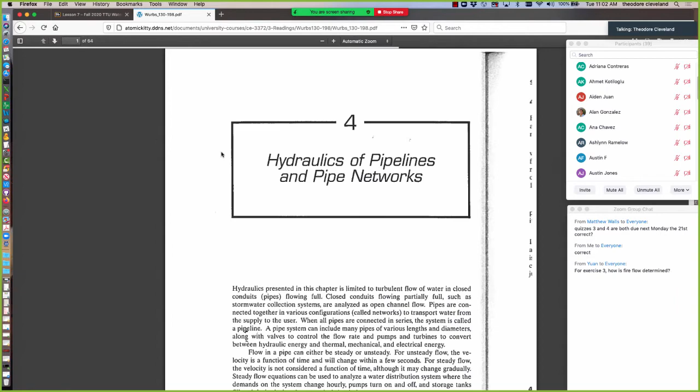Although there is a good reading on storage in the reading list in Wurbs. See if I can find it. I think it's that one. Let's find out. Yeah, so Wurbs 130 to 198 has a useful section on storage that I'm scrolling down to as everyone's logging in.

Possibly you're getting nauseous. That means I'm scrolling fast enough. Remember, if you get nauseous in my lectures, all you have to do is close your eyes and stop listening, and you'll be better in an instant.

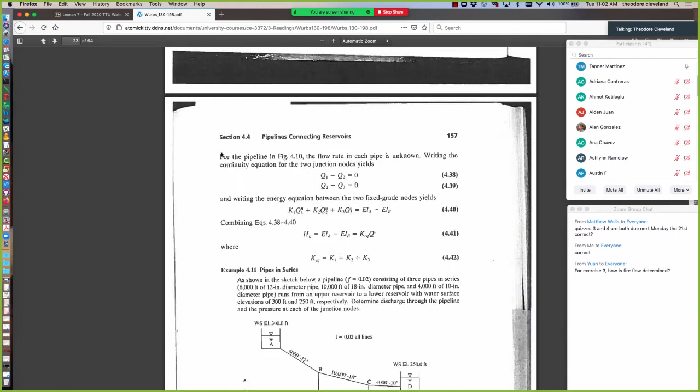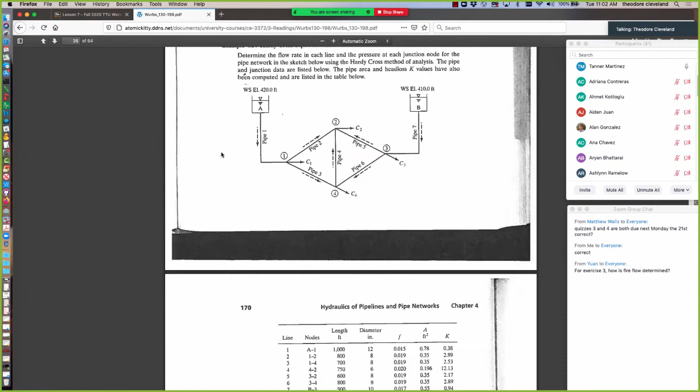We'll actually revisit this lecture in more detail starting Thursday when we start getting into network analysis. I'm pretty sure he has a whole section on storage tanks.

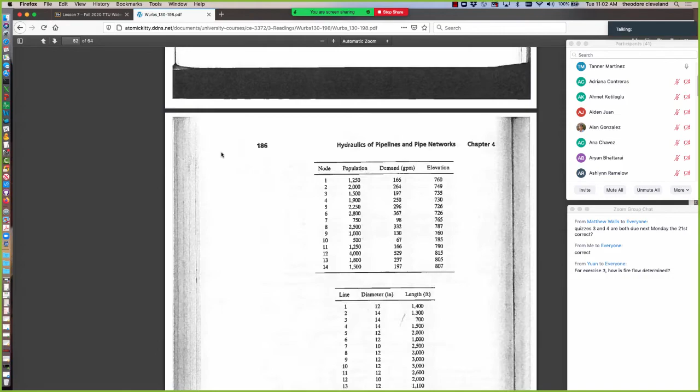Ooh, fans of my computer are coming on big time. So, yeah, we're getting there. There we go. He's got some discussion on storage, equalization, and fire, and so on. So that's a good reading.

I will try to modify the cover page to directly go to that reading. And so now we'll begin with our actual lesson notes.

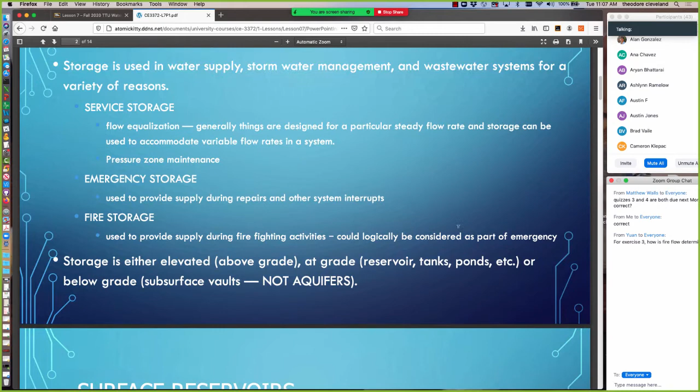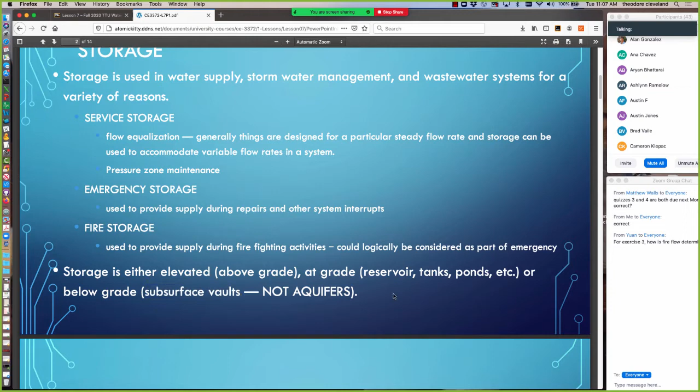Storage is either elevated, above ground, up in the air, at grade, on the ground, or in the ground, and below grade, which is subsurface vaults, not to be confused with aquifers. So subsurface vault and an aquifer are not the same thing, and it's pretty uncommon to confuse the two, but it's possible.

So surface reservoirs are used where natural elevation is high enough, and it provides us a way to use inexpensive pump storage. The reservoirs themselves are covered for their protection to prevent contamination, algae growth, evaporation.

Out there on the West Coast, a few years back, the city of Portland, Oregon, which seems to be making the news a lot lately, had some high school youth that contributed a bladder full of unacceptable water to a drinking water reservoir. And rather than just chlorinate the crap out of it, the city wasted hundreds of thousands of gallons of water from the reservoir to return it back to its usable condition. That's an example of where a cyclone fence might have prevented them from having to waste that water. I'm certain they're always young men, and I'm certain the young men had consequences for that, other than getting laughed at. Hopefully for their families, the city didn't charge them the retail cost of that water that had to be replaced.

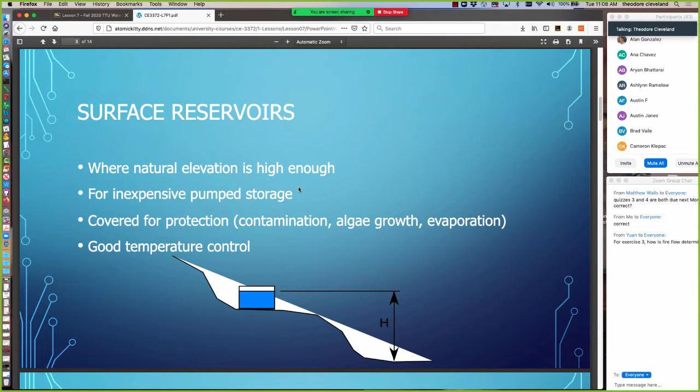For what it's worth, from a public health standpoint, there's no risk. I'm not encouraging you all to go urinate in reservoirs. That's generally a bad idea. But there's so much dilution, there's pretty much no chance of a pathogen coming out of you getting into the rest of the system, especially since the water is going to go through treatment.

So here's a diagram of what's meant by elevated storage. There's a reservoir up here, in this case on the side of a hill, and we want to serve down here. We have that much operating head, or energy, totally contributed by the pool elevation in the reservoir.

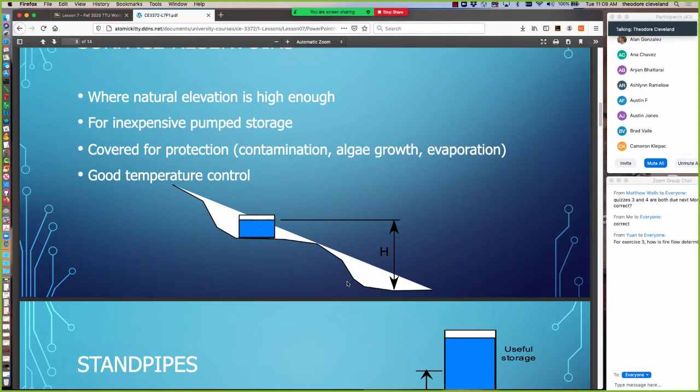So that's great, except here in Lubbock, where we don't have a whole lot of hills conveniently nearby. A second technology is called a standpipe, and these are, in their very essence, vertical cylindrical pipes, or usually cylinders, where the height is greater than the diameter, and it's filled with water. There's a pool elevation shown up here at the top.

There is a portion that's called useful storage, and then there's a portion called the supporting storage. The supporting storage is defined by the minimum desired pressure head we want in the system, and any storage above that is the useful storage. That's the volume above the elevation needed for minimum pressure, and the supporting storage can be employed in an emergency.

These are usually made out of steel or reinforced concrete. I've driven through Texas and seen some that appear to be a fiber reinforced polymer, like fiberglass, but I'm not sure. I didn't get out of the car and jump a fence and go bang on them to find that out.

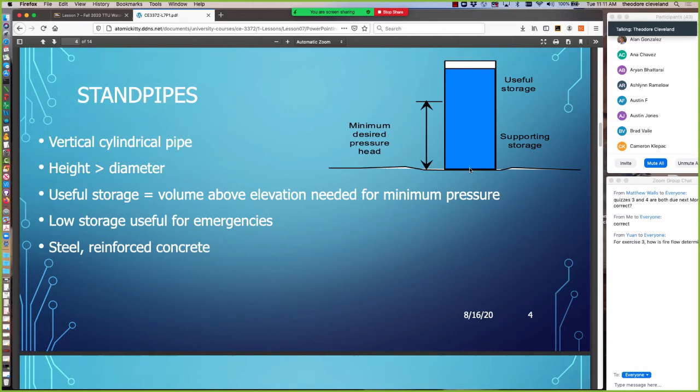It's quite possible the fiberglass was just an exterior coating. It has to be able to support the pressure down here at the bottom. So if there's 100 feet of water, that's nearly 3 atmospheres, which is going to be 45 psi at the bottom. But when you multiply by the area, that's a substantial amount of force, so there'd be some reinforcing at the bottom. But other than that pressure force, most of the weight is supported by the foundation on the ground.

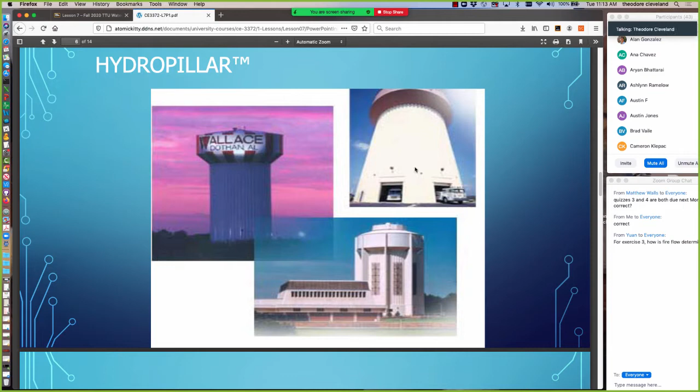A second design related to those is called the Hydropillar, and this is a brand. In these pillars, they've actually incorporated utility shops down at the bottom and the water up top. In earthquake country, I personally wouldn't want to live and work in this thing because I know how earthquakes are, and that thing would come and squash me.

A second morphology is called water spheroids. Again, the same basic design: there's a connection from the surface to the tank, providing the mechanical support as well as the infrastructure to bring water in and out of the tank, and then a spherical shape on top.

These have some utility compared to the Hydropillars. They can't get as big because of the structural requirements, since in addition to resisting vertical forces, there's clearly going to be wind forces. So these are on slender columns, and if you remember from your structures class, there are issues with slender columns—you need to be sure they don't have too much lateral force and bend over and crash and go boom.

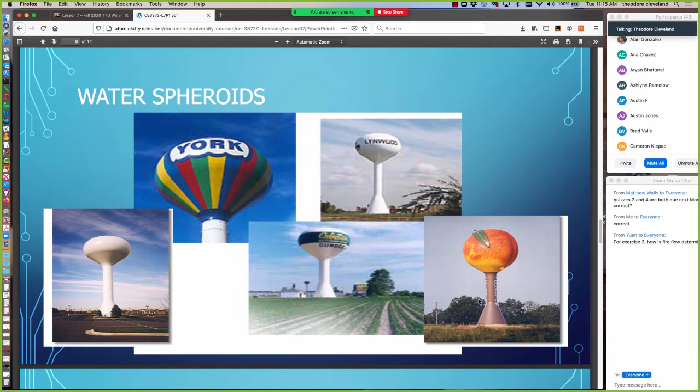So undoubtedly in this particular community, whether it's disguised as a peach, they probably grow and export peaches, or it's in Atlanta, I don't know which. They use the tower as advertising for the community. But it's the same basic thing, a big tank up in the air.

Moving to ground level tanks, we're all familiar with these. Here's large tanks with large diameter, relatively low height compared to diameter, and then here's a standpipe, where the diameter is smaller than the height. For the ground level tank, the diameter is bigger than the height, and this might be 50 or 60 feet high.

But it's hundreds of feet in diameter. These have the advantage that they can scale pretty easily, so if you need more water, you just make a bigger tank. They still have to manage pressure at the bottom, but not as much as in a standpipe, and they may have booster pumps to boost pressure to get them into the system.

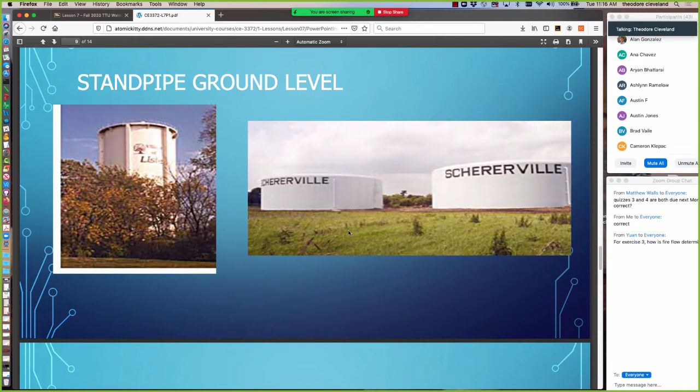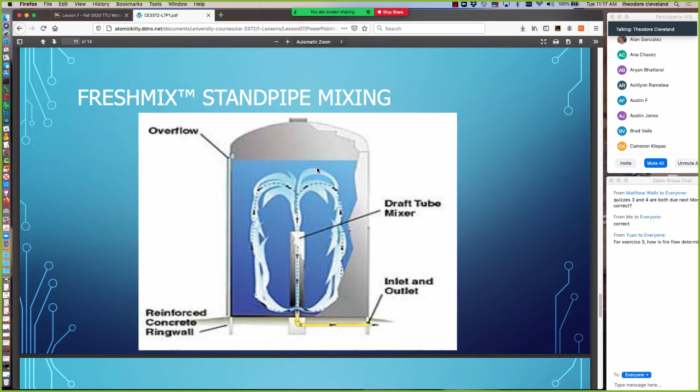Some more pictures of standpipes and reservoirs. Reservoir, standpipe—so the ground tanks are often called reservoirs. And then within many of these, when you specify one or design one, there are various vendors—a couple of companies throughout the United States that earn much of their living by designing and installing such tanks.

One is called, this is a FreshMix mixing system, and the purpose of that is to keep the water inside the standpipe fresh, in the sense that there are no stagnant zones. Because if it's treated water put in there with disinfection residual, after a few days that residual is gone and the water could become no longer microbiologically safe. But by mixing it, it can be maintained as uniformly treated for longer periods of time.

So this one's using a draft tube mixer, and there's probably an external power source to create the mixing, like a pump. Or they could possibly do convective mixing using thermal forces to make that happen. That wouldn't take any power, but I think it would be extremely hard to verify that it's functioning properly.

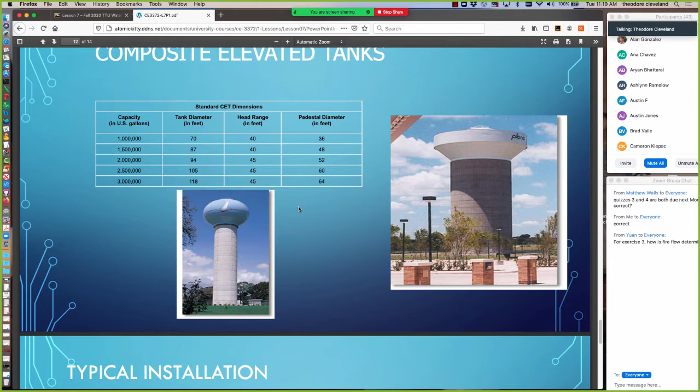And here's another one, again, of the spheroid tank. Much of this information for a specific tank would be available on the internet. And if you had a design need, you would hydraulically design it to come up with the required head ranges and required volumes, and then search the internet to find an appropriate vendor, or if you have to custom build, you have to do it.

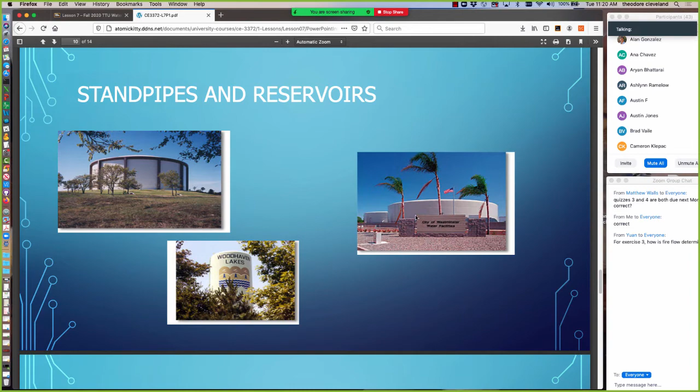So one of the bigger tank manufacturers in the U.S.—I'll make a shameless plug for CB&I, which is also a major contributor to the Department of Civil Engineering here at Texas Tech. They've built tanks like these, and they're big into ground tanks all over the world. So one of our departmental benefactors is very expert on tank building.

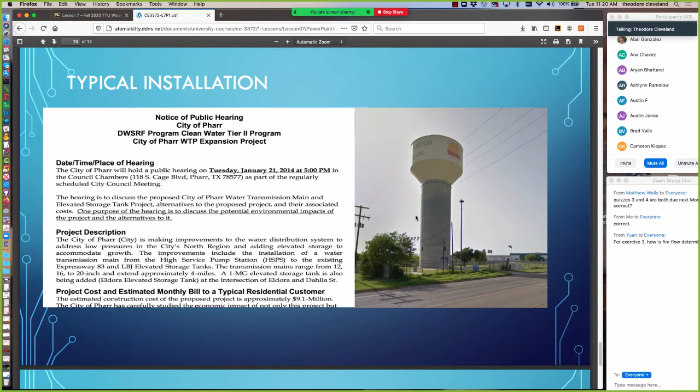And although it may seem not very new, there are still tanks being built today, and this is an ongoing need in civil engineering. I'm showing this particular picture dated 2014, so it's about 6 years old now. But the tank in the photograph was installed and designed by my wife, so it's still good business.

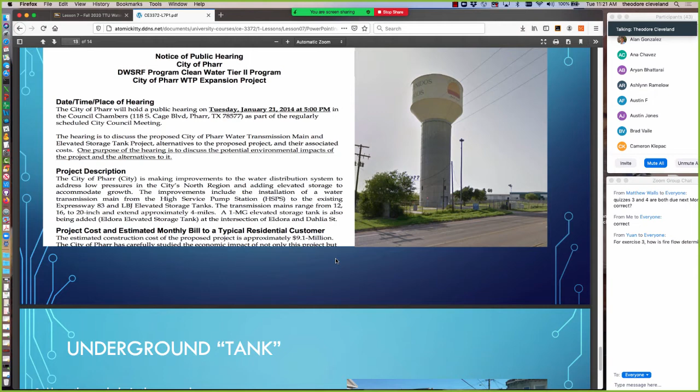So this is down in Pharr, Texas. Mexico is less than 2 miles from where the photograph is taken. I can't quite remember the direction of the photographer, so I don't know if we're looking toward the United States, or rises in the east, sets in the west. It looks like an afternoon picture.

So it could be looking west towards Mexico, as far as right where the Rio Grande bends.

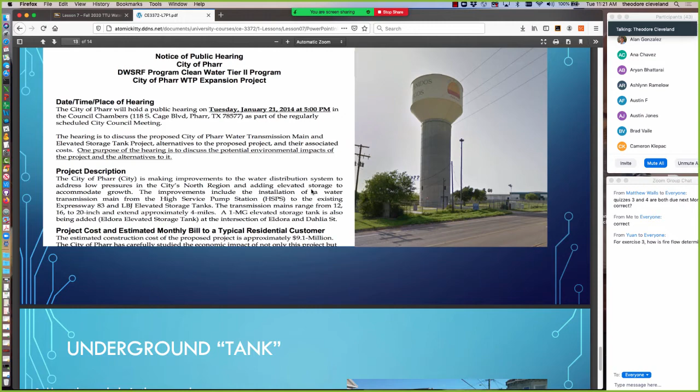A second type of tank not often thought of is underground tanks. It's more than just a hole in the ground, although it starts as a hole in the ground.

To drain an underground tank, we usually have to use a pump to drain it. The notable exception is in this photograph, an intersection in San Francisco. I grew up just a little bit beyond that house right there. These are called cisterns, and underneath this brick circle is a big metal tank.

Let's consider what this tank has to do. It's supposed to be full of water, and this water is intended for firefighting in San Francisco, because there are a lot of hills there and it's not convenient to pump water up over a hill to fight a fire. They took advantage of the hills.

So it has to store water, okay, hole in the ground, but it also has to be able to take the traffic loads on top of it. For this big hole in the ground, the choices are steel tanks and then a curved arch roof. When you take your Timoshenko class in structures on shells and shell structures, the shape of this is precisely designed so it transfers the load from the surface outward towards the periphery and sideways into the soil, or the hill as it were.

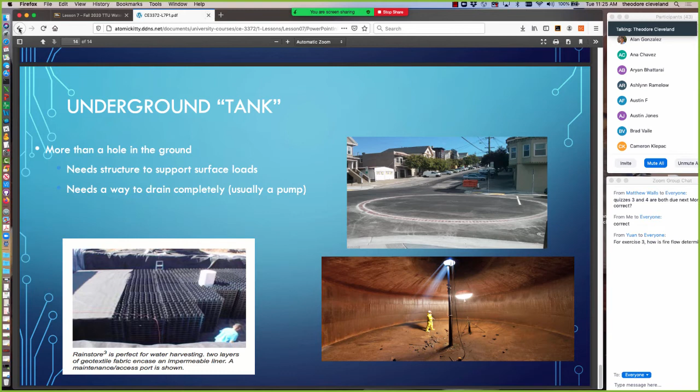So that's an introduction to tanks. Let's move on.

This next section discusses the purpose of storage, the kinds of reservoirs, and calculating. And by kinds, we've actually already seen those.

The first we'll look at is equalizing or operating storage. This is a type of storage quantity that we design for the purpose of equalizing pumping rate into reservoirs, providing storage for peak demand times, and providing system pressure without booster pumping. That's because booster pumping is expensive from an energy consideration. So if we can provide system pressure without having to run a booster pump all the time, that's desirable.

The second component is the fire and emergency pressures that are required. We obtain those values from our design documents, such as RG 195 in Texas, which states explicitly that the pressure in a distribution system that's also supplying water for firefighting has to be bigger than 20 pounds per square inch.

They put that pressure requirement there for two reasons. The first reason is so that there's enough pressure to make the system positive pressure, so that any leaks or breaks in the system won't allow contaminants to be introduced into the distribution system. The second reason is so that the fire department has sufficient suction head for their booster pumps that they use to push water up into burning flames and make them go away.

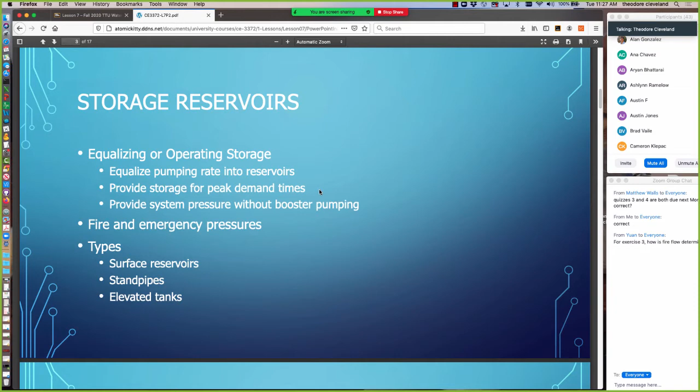And so here is a diagram that's attempting to depict the three storage compartments.

There's no particular order to the diagram. It's just a cake made out of a mint layer, a blueberry layer, and a cherry layer. I've colored the service storage in green, emergency in blue, and fire in red for no particular reason. Fire could be part of emergency, but they're often considered separately because emergency storage is also meant to have enough water in reserve if there are breaks in the system and water comes bubbling out in the street.

It takes time from when there's a water leak, to when citizens call the municipality to report water bubbling out in the street, to when they can get around to fixing it. So they need enough supply to account for that time interval. It can be on the order of a few hours or a few days, and it may be set by statute depending on the community.

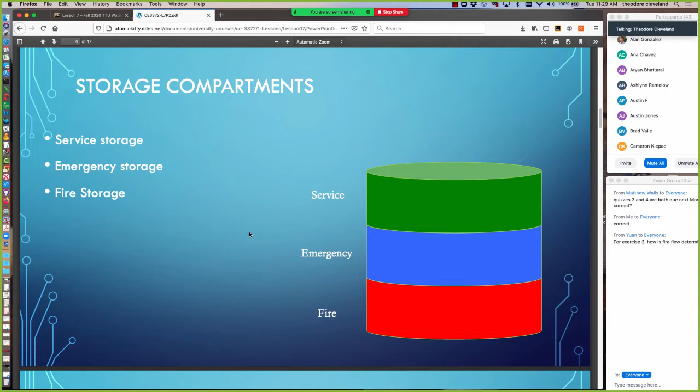Fire storage is prescribed either by statute, or if that's not available, you would use the insurance service office's documents.

So what's the goal of flow equalization? Flow equalization is sufficient storage to account for peak demands in the system without having to exceed supply capacity, and a desirable volume would be 1 to 2 days of average daily demand.

If you recall from the demand lesson, demand comes at different times of day. In terms of system design, if we design for average flow, which makes sense, there are times of day when flow rates are much bigger than that average value, and other times when it's smaller.

By using storage, we can select a pump to supply the storage reservoir that only has to operate at the average rate. When peak demand comes, we draw excess from storage, and when a deficit in demand comes, that's when we refill the storage.

It's a lot like a bank account, where one keeps money for various expenses during a month. During high expense times, you're writing a check and your account gets diminished. During low expense times, hopefully income comes in and the account replenishes. Unlike bank accounts, water accounts can only go to zero, whereas a bank account can go negative — that's called credit, and that's sometimes frustrating.

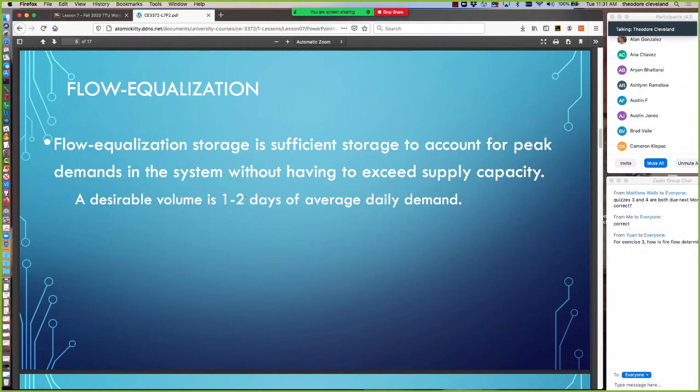Fire storage is sufficient storage to allow the system to meet routine uses plus a substantial fire flow. The desirable volume is based on expected fire flow rates multiplied by a required fire flow duration, and again, depending on application, a lot of that is prescribed.

For instance, in large buildings, there are generally tanks on top whose sole purpose is to store water to operate the sprinkler systems. Depending on how many stories and the surface area per story, the fire marshal in the relevant area sets a certain duration, like sprinklers having to run at 25 psi for 1 hour. You multiply that by the number of floors, and that tells you how much volume you have to store.

There are similar requirements at larger scales. Emergency storage is the storage provided to allow the system to operate without external supply for a period of time, to allow for repairs or other unusual circumstances.

If a system doesn't have emergency storage, then every time there's an upset—some kind of failure or break in the system—that leads to either an interruption of service or a boil water order, meaning the system has been microbiologically compromised and you don't know if the water is safe to drink, so you have to tell customers to boil it. That's not a good thing, so what we want is for those interruptions to be rare.

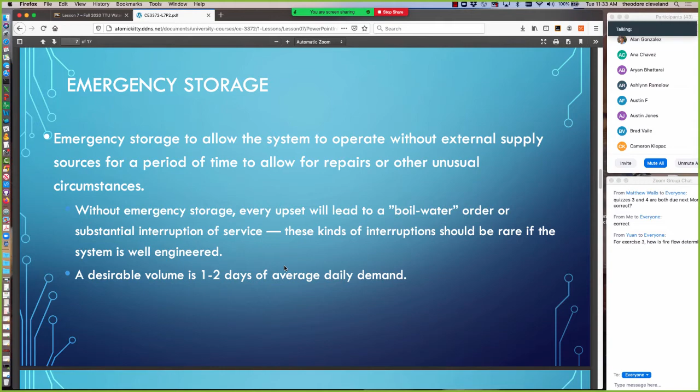Once every 3, 5, 10 years, something like that, we can maintain the system's operation while we make repairs or deal with interruptions. A desirable volume for that is about 1 to 2 days of average daily demand. Keep in mind, emergency and flow equalization rules of thumb are about the same amount of storage. So one could compute flow equalization and simply double that result.

That might be sufficient for flow equalization plus emergency storage. The question becomes, how much of those in actual volumes? An engineer would tend to choose larger volumes because reliability is proportional to how much extra capacity you have available. Economics would argue for smaller volumes. The person paying for the system asks, why am I storing water that I can't run through a meter and recover revenue? That's a fair argument. As a designer, you have to balance these competing choices.

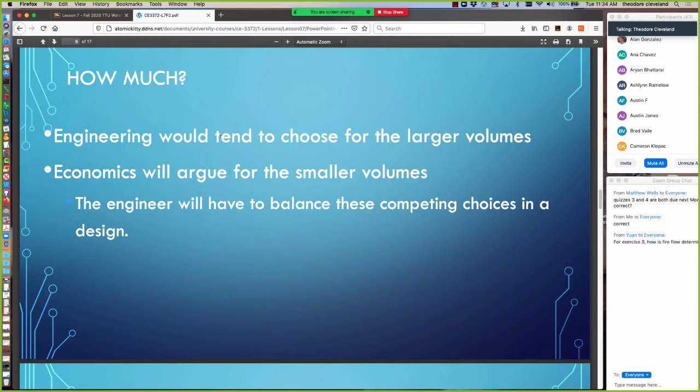You want to avoid the owner's argument that they don't need any storage, and back off on the engineering argument that they need 2 weeks worth of storage, because then nothing will ever fail. There'll be some compromise between the two, and that's done in client management meetings.

An additional consideration is how long water sits in storage before it gets distributed. The residence time in any storage reservoir for treated water should not exceed a reasonable amount of disinfection residual contact time. If the disinfection method is chlorine-chloramine, the residual will last and be effective for about 6 to 10 days. That's taken from one of my old environmental engineering books. So we don't want to store water much more than a week if we want sufficient disinfection residual to traverse the distribution system to the customer's colons and kidneys.

An alternative, of course, would be to treat the water as it leaves the storage facility, but that's an added cost we don't have to incur if we're fortunate enough to design it right. We may also have to distribute storage devices throughout the community if it's big enough.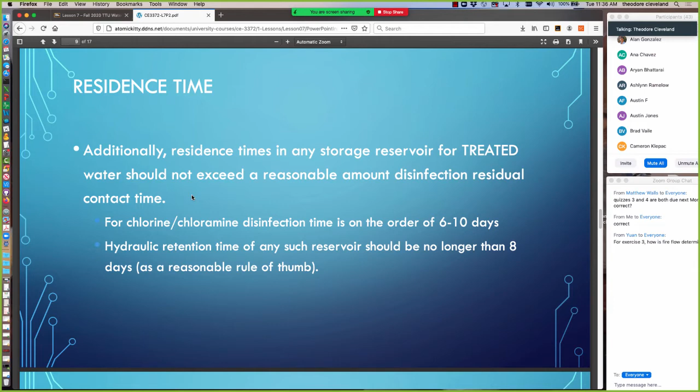The hydraulic retention time of any such reservoir should be no longer than 8 days as a reasonable rule of thumb. I would design it for 7 - that's 1 week. So if something happens on a Sunday, you have 5 days to deal with it. Or on a Saturday, same thing.

For instance, the water treatment plant in Lubbock that takes water from Lake Alan Henry is actually on automated control during the weekend. There's somebody who can get to it pretty quickly, but if anything goes wrong and the computer program can't handle it, it's 2 days until they can get around to starting any kind of repair. Now, they have sufficient water stored there that it's not a problem. But those are the kind of things that happen in our more modern systems.

To save employee money, we have to operate the systems several days in a row unattended. Our computer programs are pretty good - they can handle most things we can anticipate would happen. But literally, if a piece of hardware breaks and there's nobody there, all the computer can do is an elegant shutdown and report that a piece of hardware is broken, and you have to get a crew out there. If that comes in on a Saturday afternoon, you would ask, how much storage do I have? Because that means you could schedule the Monday crew that's going there anyway and not have to incur overtime costs.

So what's hydraulic retention time? Hydraulic retention time is defined as the ratio of storage volume to average discharge through the reservoir. The formula shows HRT equals the volume of the tank divided by the flow through the tank. If you recall, volume is length cubed, and flow is length cubed divided by time, so the ratio of volume to flow rate returns a value of time - something like hours or days, depending on the flow units used.

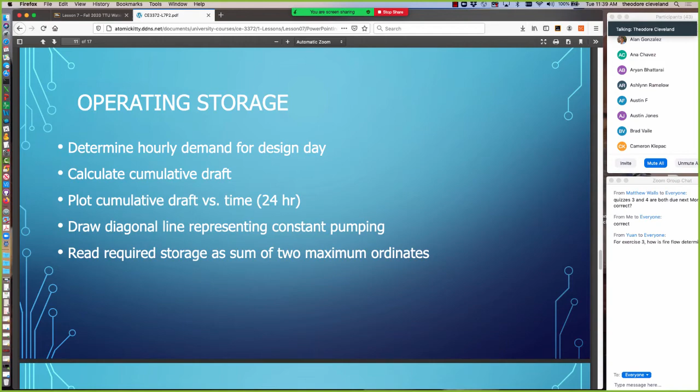So one thing we could do is just pump in water at whatever the indicated slopes are all the time and just boost water into the system. No storage required. But then we'd have a pump running all the time. It would run at very low flow rates until the slope changes, and then it would have to run at a higher flow rate and then slow down again.

Mechanical devices, like pumps and their electrical motors, don't work well if you change their speeds a lot. I mean, they can be made to work, but every time you change speed, you're changing the forces on the bearings and the lubrication system. Pumps run better at a constant speed.

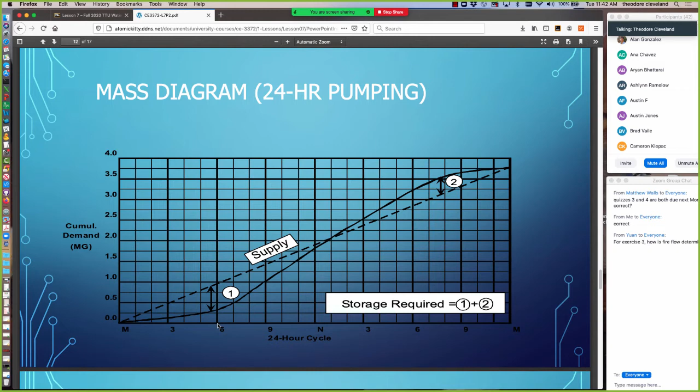That's if we're running the pump 24 hours a day. Let's suppose we only ran it 12 hours a day, from 6 a.m. to 6 p.m. Then the supply line would go from 6 to 6. It would be a line right there where the cursor is going back and forth.

Here's that same example. In this case, we find the maximum deviation at the two locations, add them together, and that would be the desired storage. And so during the periods when the pump's not running, all the demand is being satisfied by drawing down water in the reservoir.

Oh, cat, just change the volume. Well, you can stay there. You're fine. This is perfect. You're helping me.

In this case, when the pump is not running, all the demand is satisfied by water coming from storage. And then when we turn the pump on, we replenish that storage. We won't be replenishing in this region. We'll still be drawing from storage until we get crossover. And then up here, we're starting to replenish the storage. You add the two together, and that's the required storage.

So here's that same information shown in a spreadsheet. We'll actually look at this particular spreadsheet shortly. What we have is average hourly demands in the table below, and we want to find the uniform pumping rate and the required storage.

So we have the times listed here. We have the hourly demand, which is determined either from historical records or similar communities nearby, or a demand calculation like you're doing for exercise 3, multiplied by an hourly variation chart taken from some reference. And from that we accumulate the required volumes in this third column, cumulative demand in gallons. Then we pretend we have a pump. If we have a pump running at 5,110 gallons per minute, it's supplying these particular volumes.

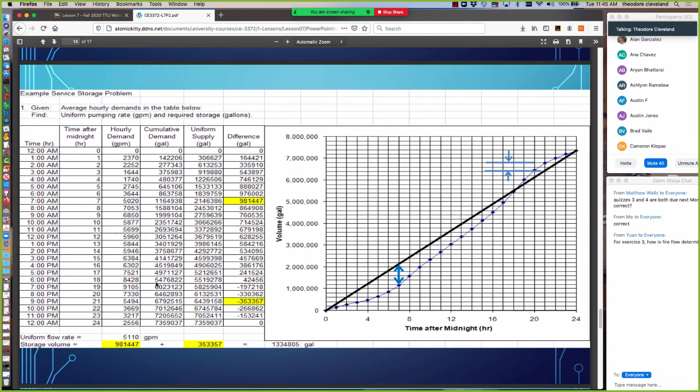We look through these differences and find the two biggest ones, the biggest positive one and the biggest negative one, using the absolute value of the negative. We add the two together to get, in this example, 1.3 million gallons for this situation.

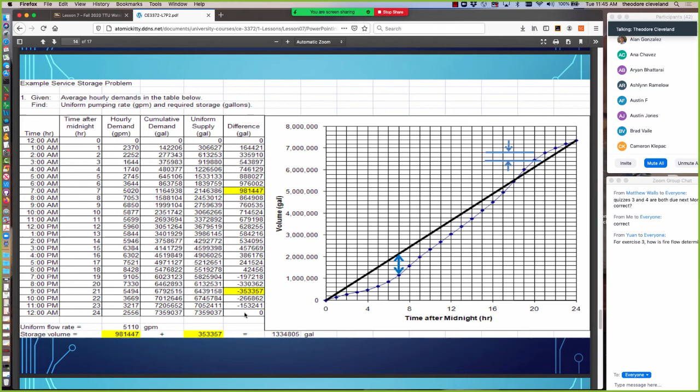If we play the same game for a 12-hour period, depending on where we start and stop the 12 hours, we find the biggest negative difference and the biggest positive difference, add them together using absolute values, to come up with 2.7 million gallons required if we only have 12 hours a day of pumping. With shorter and shorter pumping intervals, those values would change.

The reason to consider less than 24 hours is not everywhere in the world do you have electricity 24 hours a day. I've personally visited places where electricity is on for only portions of the day, so you would want to leverage that. Or if you're designing for a case where you might lose power and provide your own, you may only have enough diesel fuel stored to run your generators for 12 hours.

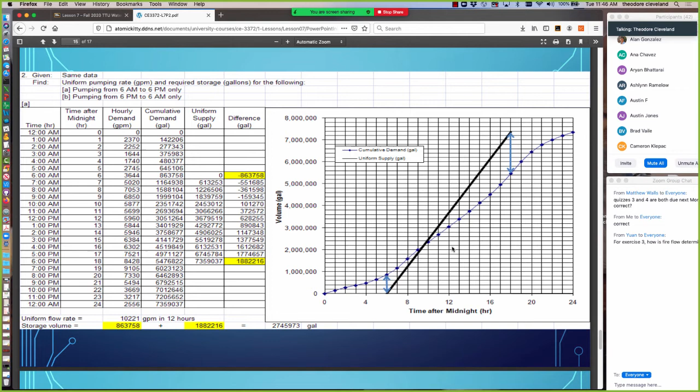That completely defines your storage requirement. Depending on when that 12 hours occurs, the required storage values might be different. In this particular case, if it starts at 6 p.m. and pumps to 6 a.m., this has a much different storage requirement than the prior one, from 2.7 million to 4.6 million.

So the prudent designer would have to check several of these in order to specify an appropriate volume for storage design. In doing these, you have to decide which demand we're going to use, whether daily or peak. These volumes are added to emergency and fire flow, which ultimately determines the tank volume required.

Once we know the tank volume we want, the biggest of all the anticipated volumes we examine, we can choose a tank type: elevated, at grade, or buried. That decision determines the shape, elevation, diameter, and minimum and maximum level. In the case of elevated tanks, we also have substantial structural considerations outside the scope of this class, but your structural engineering classes cover that.

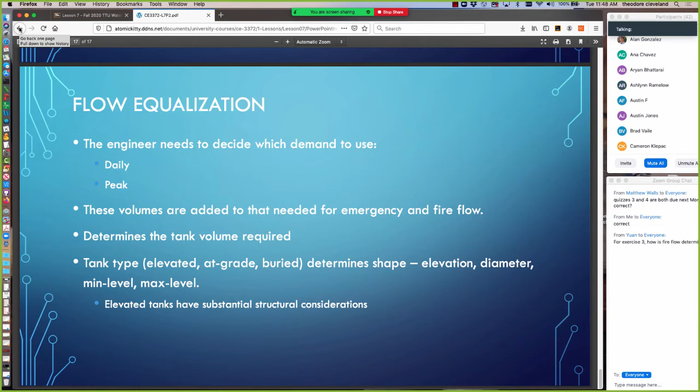And I forget if there actually is a part 3. Oh, we'll get to part 3 in a second. Let's go look at...

So here's the storage examples that were used in making the presentation. This could be a typical homework or exam type problem. The average hourly demand rates in gallons per minute for a municipal system are given in the table below.

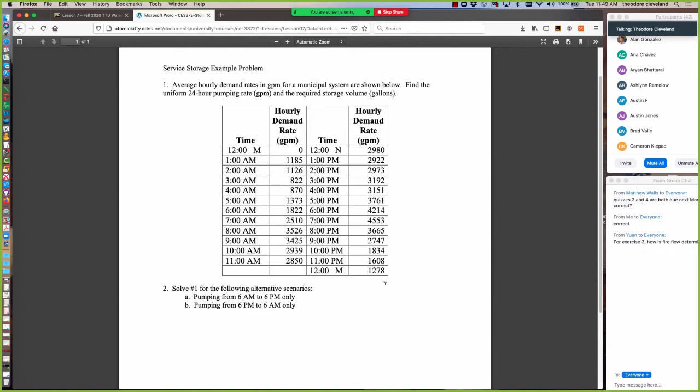So midnight to midnight. The average hourly demand starts at 0 and ends at 1278, so you could argue that 1278 and 0 are the same place. Find the uniform pumping rate and required storage volume.

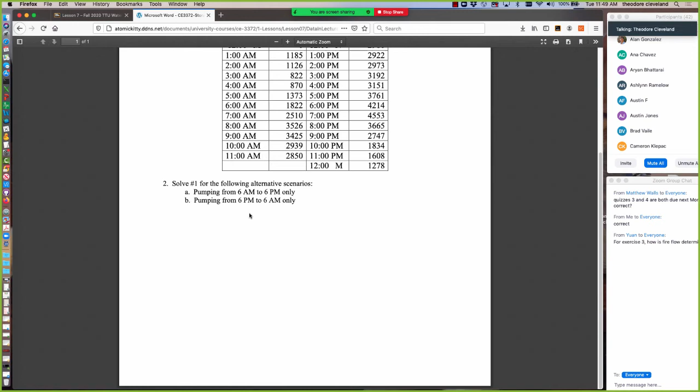And then repeat it for 6 a.m. to 6 p.m. and 6 p.m. to 6 a.m. So there's the problem statement, and let's go look at it solved in the spreadsheet.

So I hope this works. I actually never tried to run the spreadsheet over the... spinning beach ball is often a good thing. That looks correct.

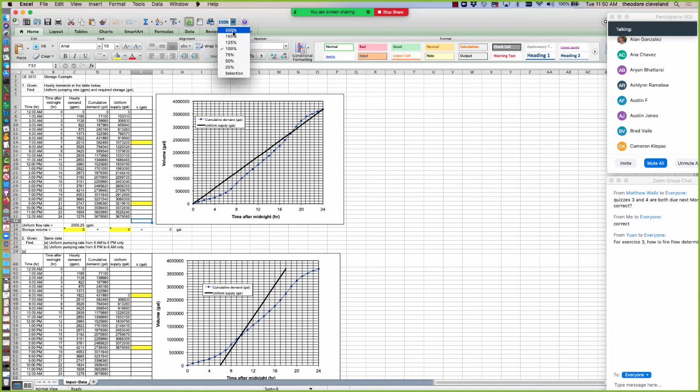Okay, that should be big enough to see. So here's the first part. Here's that hourly demand going from 0 to 24 hours, and this is taken directly from that table that was in the problem statement.

Here's the cumulative demand, and let's look at the formula right here. The cumulative demand says: look at the current hourly demand in gallons per minute, multiply by 60 minutes to get how many gallons were needed in 1 hour, and then add that to the previous cumulative amount. So it says this equals above plus 60 times left.

So at the end of that hour, at 1 a.m., to satisfy the stated demand, we would have had to supply 71,100 gallons.

At 2 a.m., we would have had to supply the 71,100 gallons plus almost another 70,000 gallons for a total of 138,660 gallons. At the end of the third hour, we take the 138,660 gallons and supply about an additional 50,000 for a total of 187,980 gallons. We repeat those calculations all the way down, and at the end of the 24-hour period, we would have had to supply a total of 3,679,560 gallons.

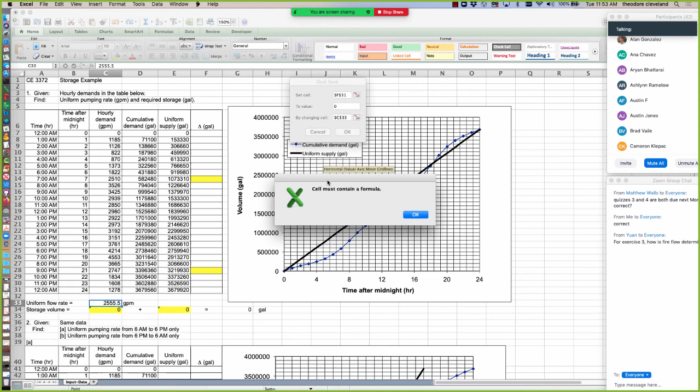We can use an interesting tool, Goal Seek, to get the correct number. Let me see if I can find it... Goal Seek. There we go. Now let me go ahead and do that. Tools, Goal Seek, set cell equal to 0 by changing cell. Hit okay.

And we're done. So now we've got the constant pumping rate that will provide, at the end of the day, the total required demand. Now let's just copy this formula — we're doing demand minus supply.

Here we have our biggest negative deficit right there, and our biggest positive deficit right there. In this case, it's actually already taken care of by the spreadsheet — it finds that number and that number automatically, algebraically adding them together, taking care of the minus sign, for a total required storage volume of 600,000 gallons. That's all that's needed if we have 24 hours to pump.

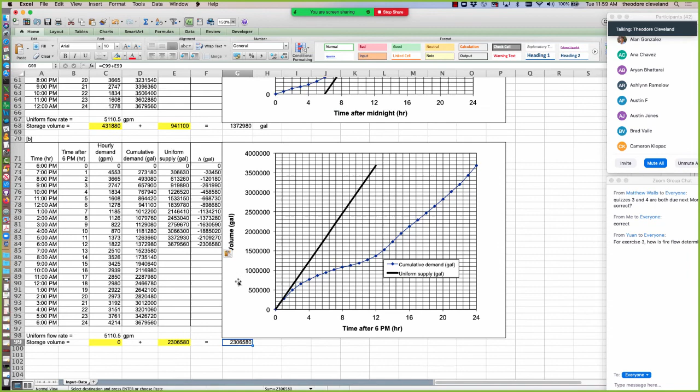And lastly, we need to copy the logic and let the computer find the required storage: 2.3 million gallons. So with the time and the hourly demand, the computation of equalization storage is relatively straightforward. There's nothing special about the spreadsheet — you could just as easily, or essentially, do this with a hand calculator.

Didn't want that to happen. Let's see what happened to that — that was weird.

Now to finish the lesson: we're not doing computer models today, but storage in computer models is initially confusing. Once you see some drawings that I'm about to show you, I think it makes it quite a bit simpler. The two computer models we'll use in this class are, computationally, quite similar to the computation engine of commercial programs, but the commercial ones have more extensive interfaces.

Both EPANET and SWMM share similar features in storage requirements. The minimum data either requires is the bottom elevation of the tank, the minimum pool elevation (the distance above the bottom elevation to the lowest part of the pool), the beginning pool elevation (which can be the minimum or maximum), the maximum pool elevation (how deep the water can get), and either the tank dimensions or a depth storage curve.

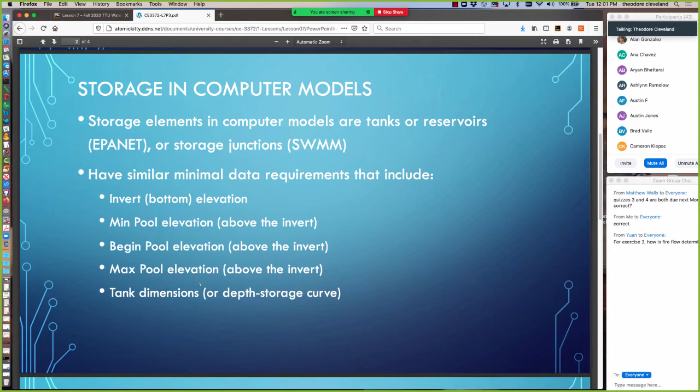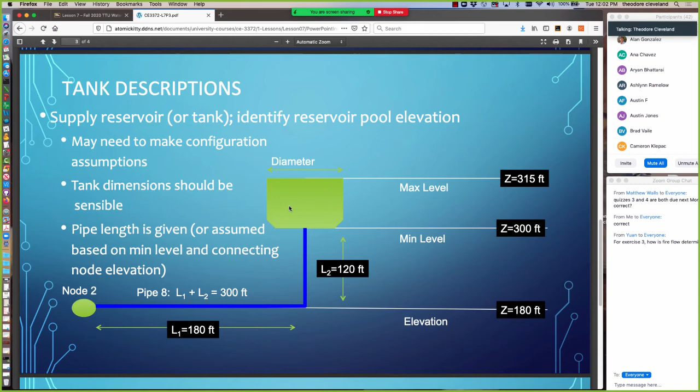The minimum length this pipe could be would be the 120 feet of vertical. If it's less than that, the computer program would identify it as a nonsensical length based on the minimum pool elevation supplied for the tank. Then we provide the bottom elevation of the tank, which gets assigned to the node. From the bottom elevation to the minimum level is supplied in the tank input information, then the min level to the maximum level is supplied as tank information, and then we either supply the diameter or a storage depth curve.

We can also use volume versus depth to convey the storage. When we get to the computer programming in a few more meetings, keep this graphic in mind, because it will help you conceptualize elevated storage tanks or storage tanks in general into a computer model. Even the models we build ourselves by hand - we use the same mental construct.

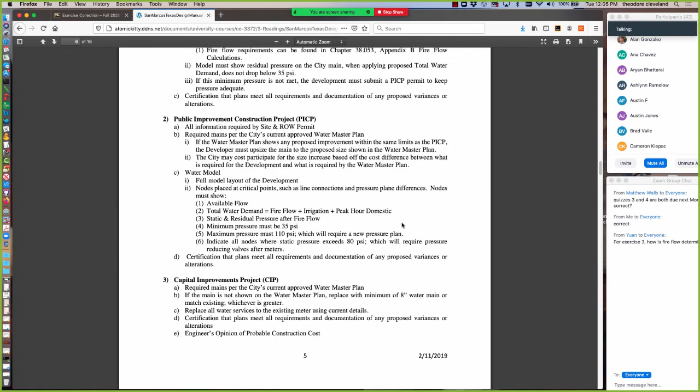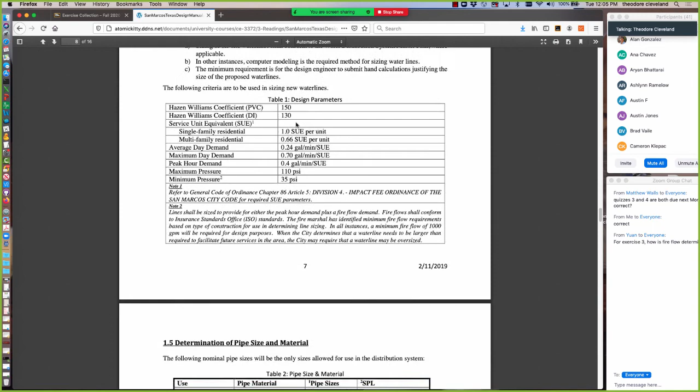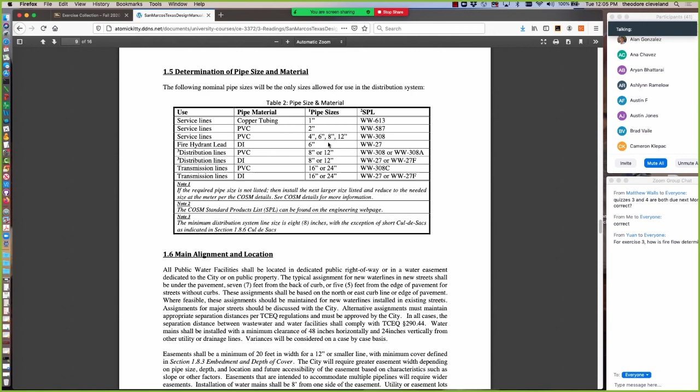Let's read through the manual and see what it says about fires. Nothing on fires on that page. Nothing on fires on that page either, although it's pretty handy - it's telling us what Hazen-Williams coefficients to use. That's pretty handy, and it has conversions for service unit equivalents. It tells us what fire hydrant material has to be - ductile iron.

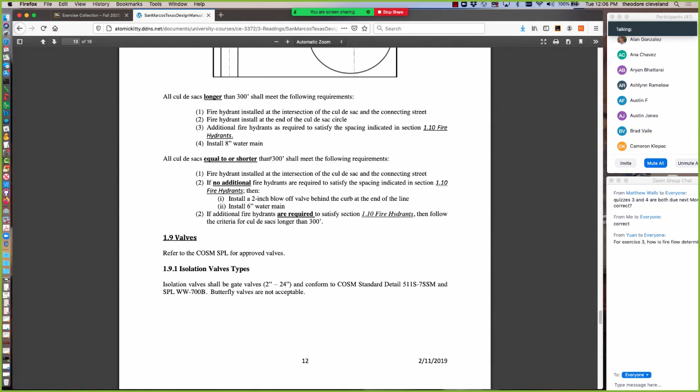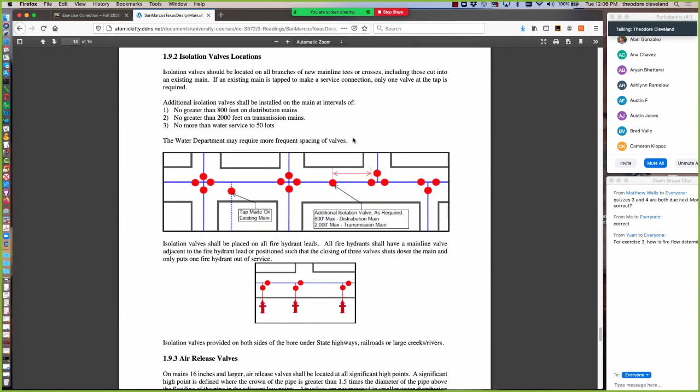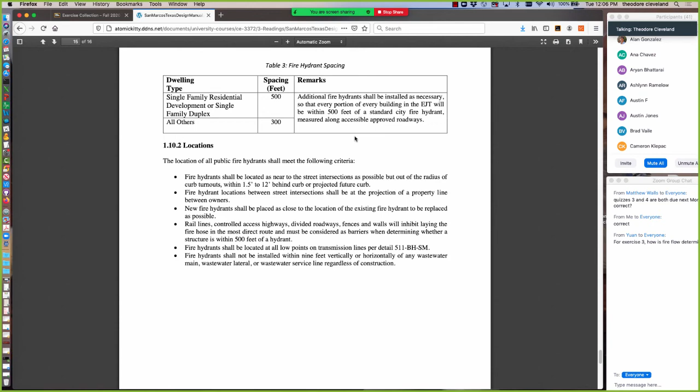It tells us fire hydrants are installed at the intersection of a cul-de-sac and connecting street, and fire hydrant spacing is in a different section, so we'll get to that shortly. This is supposed to be section 1.10: fire hydrants shall be located as near to street intersections as possible, but out of the radius of curb turnouts. In single-family residential, fire hydrants are required every 500 feet.

So that gives us all the information we need. There's going to be a fire hydrant at every cul-de-sac entrance, regardless, and then a fire hydrant every 500 feet. So when we return to our picture, we're going to figure out fire hydrants. 500 feet is roughly half of the 1100.

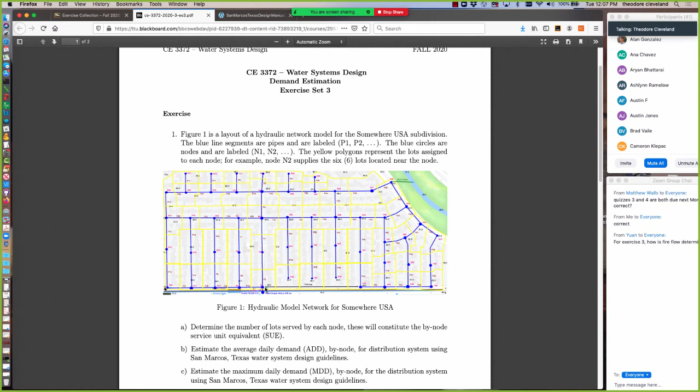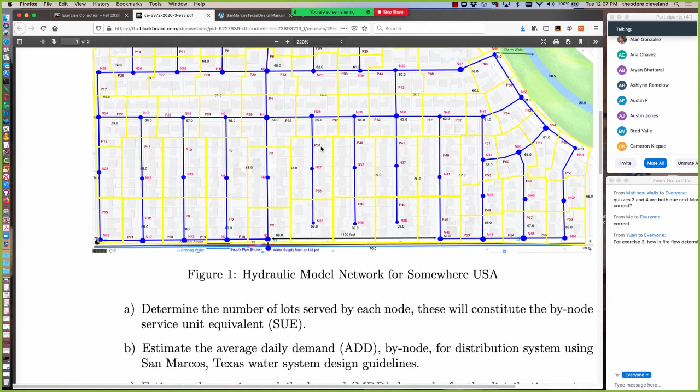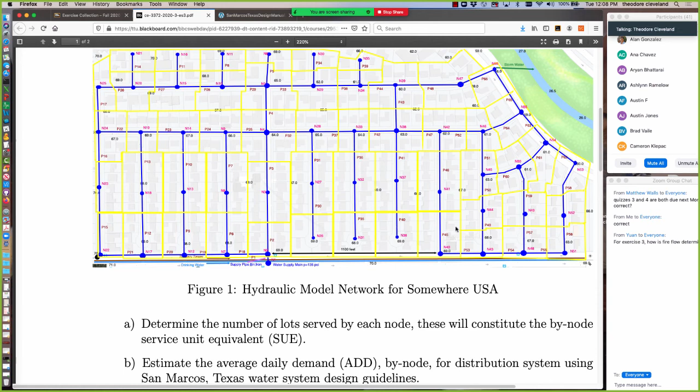So first we find the cul-de-sacs. Here's a cul-de-sac, so there's going to be a fire hydrant there. That distance is longer than 500 feet, so there'll be a fire hydrant there, and there'll be one somewhere in here. Then we do that for the other cul-de-sacs - there'll be 2 on that one, 2 on that one. The rest are through streets.

Going from these intersections, work 500 feet to get the number of hydrants along that street - 500 feet along that street, 500 feet along that street, and then 500 along each of these. Repeat that, and that gives you the total number of fire hydrants required in this subdivision.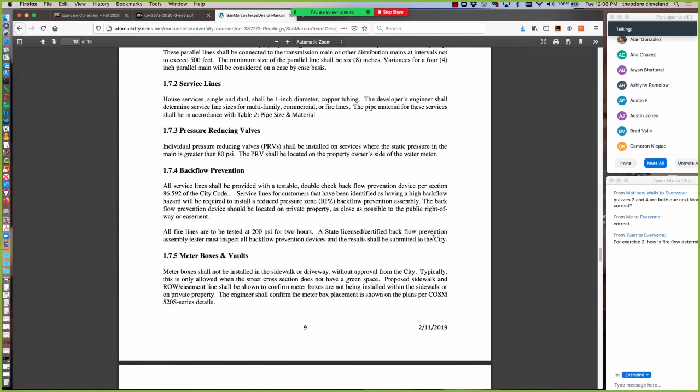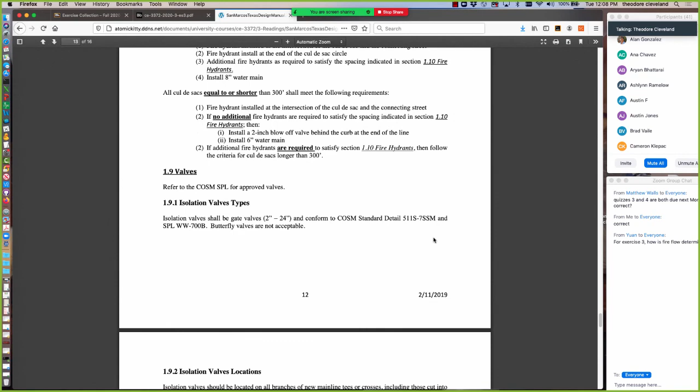There should be a flow specification for each fire hydrant - I think it's probably 1,000 gallons a minute would be my guess. So first you locate the fire hydrants, and then we're going to go ahead and specify their flow rates.

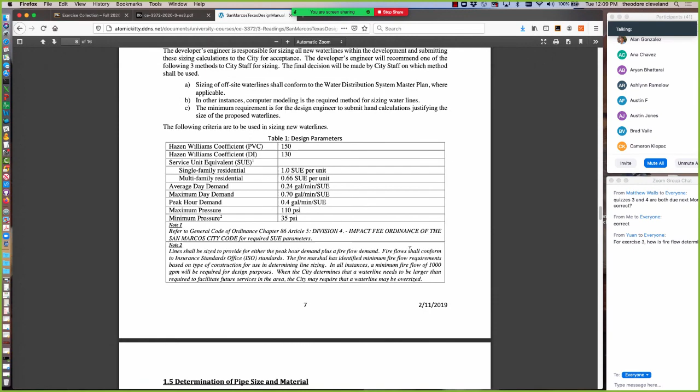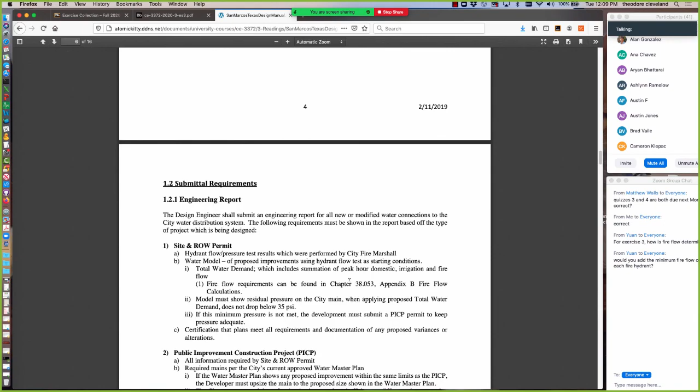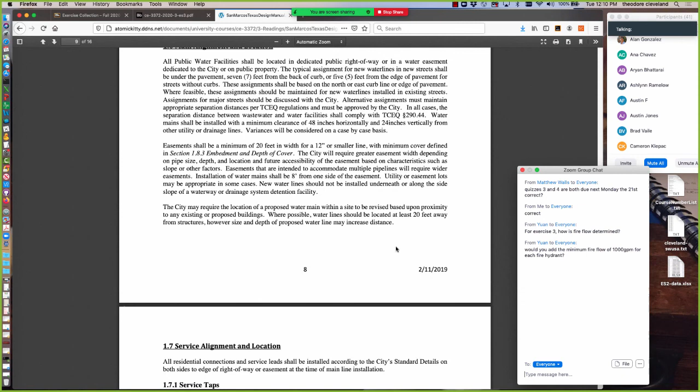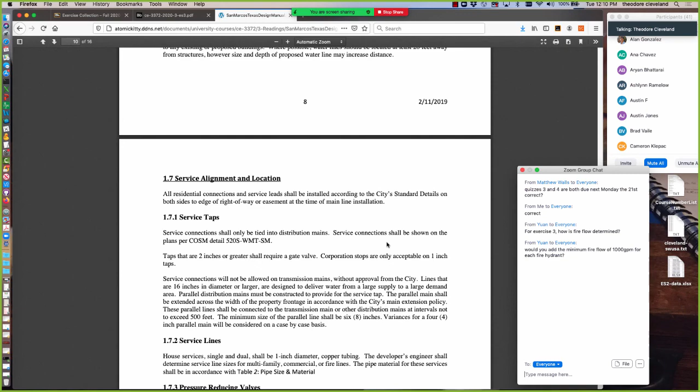Hydrant flow. That's an excellent question. You would make a determination of how many hydrants would be in use during any fire. It's certainly not going to be all of them. So maybe 2, or actually 2 hydrants at most is most likely.

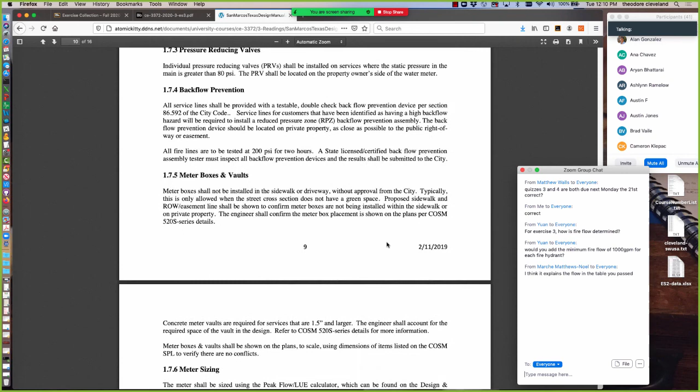I think it explains in the table I passed to someone. But to answer the question, if you identified that you got 18 hydrants in that particular subdivision, you would not have 18,000 gallons per minute fire flow for the whole subdivision, because it's unlikely the whole thing's on fire at once, unless it's out on the West Coast right now.

But with the minimum spacing of 500 feet, most fire trucks really don't have more than 250 feet of fire hose. So the most number of hydrants that you could involve in a 2 or 3 alarm fire would be 2, and that's only going to get you partly close to the fire.

So I would say with that you would at most only have 2 hydrants involved in any fire at once, and so you would design it for 2,000 gallons per minute total fire flow for the system. You would state that in your design documents that during the fire flow calculations we assumed that at most only 2 hydrants could be in service, because of practical limitations on the carrying of fire hose by the fire department. The amount of hose that a fire department has is usually specified somewhere.

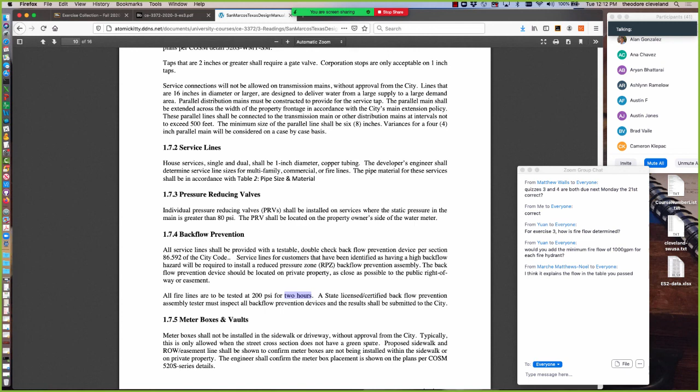So I hope that gives you both guidance to complete the exercise and some of the art involved in water system design. It's those kinds of thinking that has to be incorporated in the design because it's not explicit. They also tell us how long we have to provide that flow - 2 hours in the case of the San Marcos guidance document, which is what I would like you to use for this exercise. So that's my guidance to you for completing the exercise.

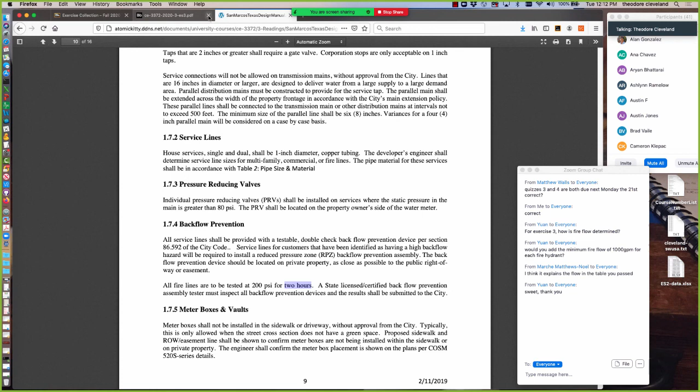Oh, I regret that, I shouldn't have done that. Let me get back to... I don't want to lose the link. Oh, Blackboard's running awful slow today. There we go, back to lesson 7, and more importantly, I just want to get back to the link. Okay.

Are there any other questions? Otherwise, I'm going to go ahead and have this as a short day, and thank everyone for their attention and patience. Next time, we'll start looking at distribution networks.

So the next few lessons are complex, and I will try to go as slow as I can. I have a tendency to just blow through stuff, but we're going to actually look at the arithmetic of network systems analysis from the standpoint of if we had to do it in a spreadsheet, for instance, and then we will go into the professional software. After we've done it in a spreadsheet, you should have a pretty good understanding of what goes on under the hood in professional software.

And the advantage of that is it's quite easy to put numbers into the professional software and get something to run and get pretty pictures out. Sometimes the output doesn't make sense, and oftentimes it's usually a hydraulic input error. If you know how it's doing the computations, you can run those errors down pretty quickly and find a conceptualization error - it's literally as simple as a decimal point in the wrong place. So that's where we're headed over the next few lessons.